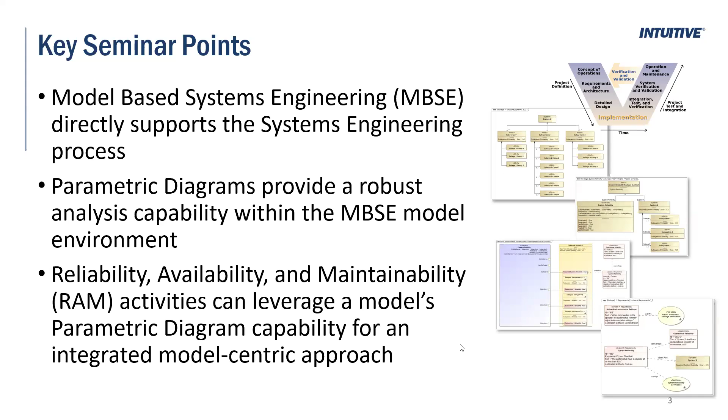So the purpose of today's presentation is to simply describe how RAM analyses can be performed within a system's MBSE environment. The topics you see here: we'll do a brief introduction to MBSE, talk about the example model and the tool that was used, the language, and various diagram types. And then we'll take kind of a methodical approach.

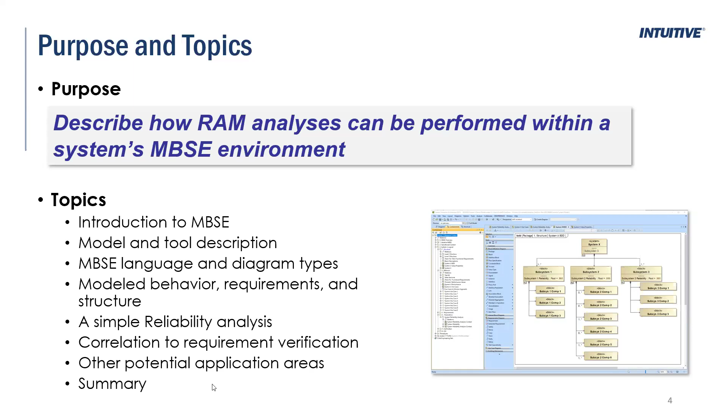Into this parametric diagram and analysis by talking about model behavior, then requirements, then structure. And then we'll get into a very simple reliability analysis using parametric diagrams. We'll correlate that to requirement verification and talk about other potential application areas. And then you get to torture me with your questions, which I hope won't be too hard.

Okay, model-based systems engineering. We get all amped up over the MB part, the model-based part, and very often we don't remember or think about the SE part, which is systems engineering. So some of you may be familiar with the systems engineering process V. There's a bazillion versions of this out there.

I picked kind of a simple one here, but it gets the point across. So before MBSE, as good systems engineers, this is what we did. This was our sort of guidance, our process. We start up here in the upper left with ConOps and operational needs, and go on down through functional analysis, then developing structure and performing the synthesis, which is allocating that required functionality to structural components, and back up the other side with putting it all together in integration, and then verification and testing.

And guess what? In an MBSE environment, we're still doing that same stuff. It's just that now we have really good state-of-the-art PC tools, MBSE tools that help us do these things and supplement them using graphical notations, languages that have syntactical and semantic meaning.

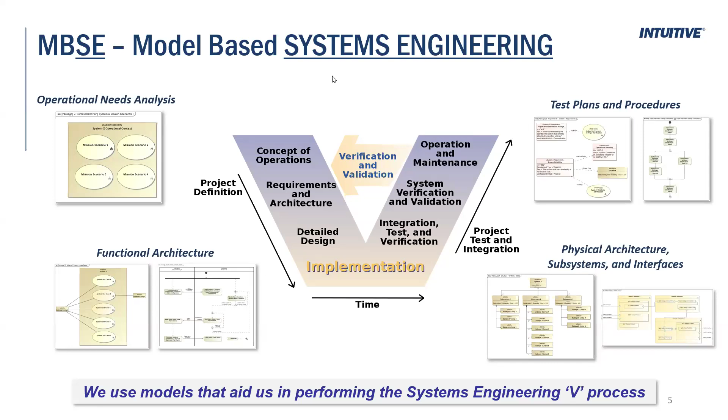So today's example model was developed using an MBSE tool, Cameo Enterprise Architecture. You may or may not have heard of it, also known as MagicDraw. And I'm also going to make use of the Cameo Simulation Toolkit. That's an additional add-in or plug-in that goes along with Cameo Enterprise Architecture.

Notation is straight SysML. You may be aware that there are various frameworks out there, UPDM, which includes DODAF, UAF, the Unified Architecture Framework. And all of those frameworks are great. I'm a believer in UAF myself, I love it. But to keep this simple and not get confused with other terminology that these frameworks bring into the picture, I wanted to stay with straight SysML.

So that's the language, SysML. It's a foundational language to all of these various other frameworks.

Our system of interest is simply System X. It is completely notional. Any resemblance to anything real is purely coincidental and maybe a figment of your imagination, because there is, it should not come close to anything that is out there. But it could be anything. Okay, it's so generic, it could be anything. And here you kind of get an idea, even a CubeSat. So keep that in mind as we go.

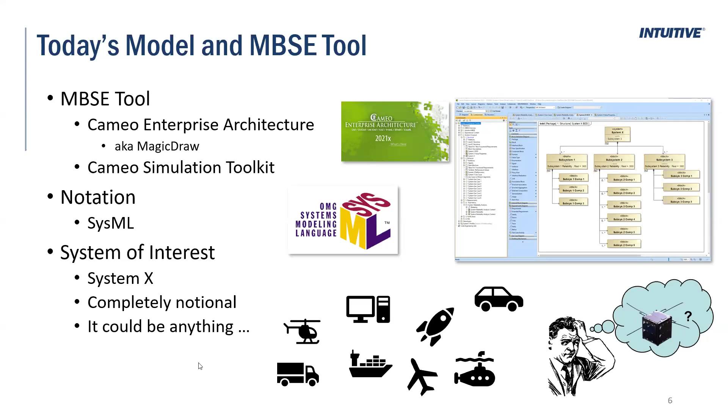Okay, the MBSE language. So we use, as I just stated, SysML, the systems modeling language. SysML gives us 3 diagram categories, 9 diagram types. We'll talk about them in a second. Very defined element types and relationships between these elements.

That's the underlying meta model, and so everything on these diagrams has semantic meaning. We're not just drawing PowerPoint shapes or lines. Everything that goes onto a diagram ends up in the meta model as an actual distinct object with attributes and relations, and that's really the backbone of the model. These element types, how they relate to one another, and how we can put them together to form diagrams that really tell the story we need to tell from a systems engineering standpoint.

Are we stuck with just what SysML gives us? No, we can customize. We can add custom stereotypes. Here's your tip for the day though: be very cautious about doing that. I've done that in the past, and I've got the scars from it. At first, it may seem like a cool thing.

If the language doesn't quite meet your need, go ahead and throw in a couple custom stereotypes or maybe a custom relationship. But here's the issue with that: the second somebody else picks up your model, they're not going to understand what you're talking about, and so that's the downside. I have found that it's so much better to try to stay within the confines of the language, customize if you absolutely have to, but I would not recommend making a habit out of it.

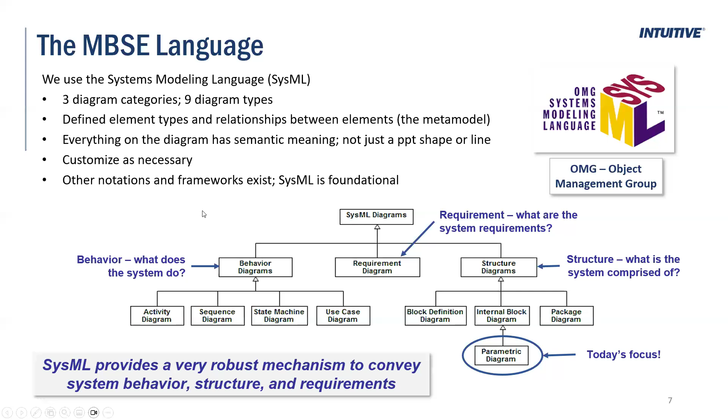I want to talk just very briefly about behavior, because what we're going to be doing is more on the requirement and structure side, but just to cover all three diagram categories, here's an example of say a set of system use cases where we define what those top level system functions are. I just call them use case A, B, C, D, and E. We show that there's a relationship to an external entity, an external actor.

And then we elaborate that with activity diagrams - think functional flow. And again, all of these element notations have a meaning. So for example, this long black bar is a fork. It means that we're doing both of these control flows in parallel, so this functionality occurs in parallel with this functionality. You see we have decision logic and loop backs and merging.

And so we can model out our required threads of behavior for our system of interest. You can see kind of the threads going on here. So that's just a very, very quick example of how we model system behavior.

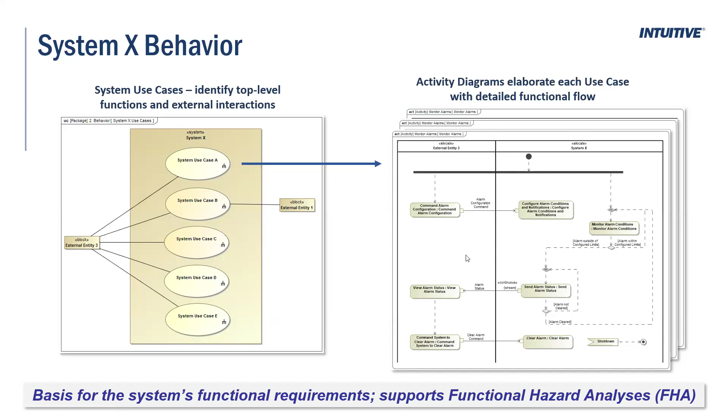So let's shift gears now and start to move towards this parametric analysis and talk about RAM type requirements in a typical system specification.

I don't know if anybody here is familiar with MIL Standard 961 or the data item description that's been around forever for a system/segment specification, 81431A. But this is the basic organization of at least the DoD system requirements specification. You get down into section 3.0, the actual requirements, and of course you've got to have your scope and applicable documents up front. But section 3 is where the requirements really begin.

So, for example, the capability requirements would be based on the behavior modeling I just talked about. But let's focus on system quality factors. That's typically, and I say typically because the first time I say that's the rule, it'll be broken and won't hold true, but typically we put reliability, availability, and maintainability requirements under system quality factors.

And that's what we've done here. We expand this package out. So in our containment tree, in our model, for what reasons unbeknownst to me, we don't call these folders, heaven forbid. We give them a special name. They're packages. So these are packages, even though they look like folders.

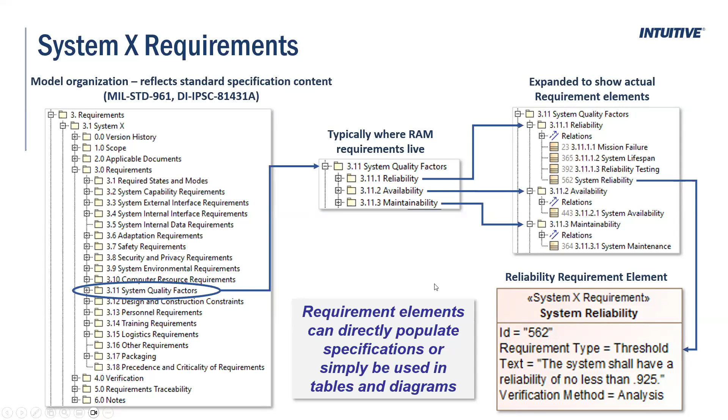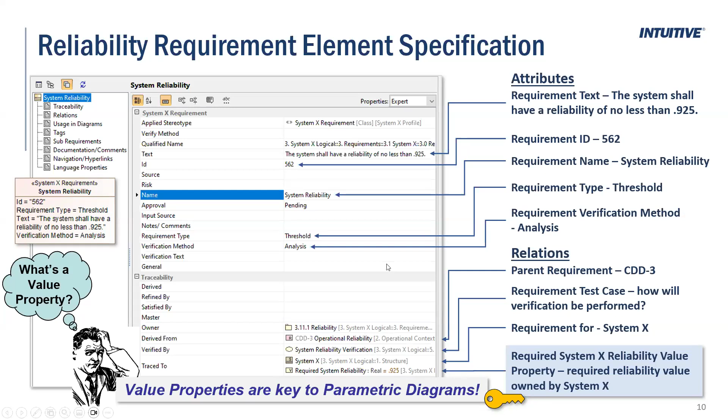Let me get down to the bottom right here, the anatomy of a value property. It's got a name. In this case, we're looking at subsystem 3's reliability, so that's the name, subsystem 3 reliability. Value properties can take on four types: real, integer, Boolean, or string. In this case, these are real values, and then the actual value itself, in this case, 0.980.

So what's going on here? Here's another block definition diagram, BDD. This time we're not doing types and subtypes, we're doing an actual directed composition. How do I know that? I know that by looking at the symbol on these arrows, this black diamond that's shaded in, and these arrowheads. This basically means that if I'm going to have a system X, I've got to have at least one or more subsystem ones, I have to have one subsystem two, and I have to have one or more subsystem threes.

Looking at it the other way, these subsystems do not exist or cannot exist outside of the context of being part of system X. So again, the symbols on each end of the line are very important.

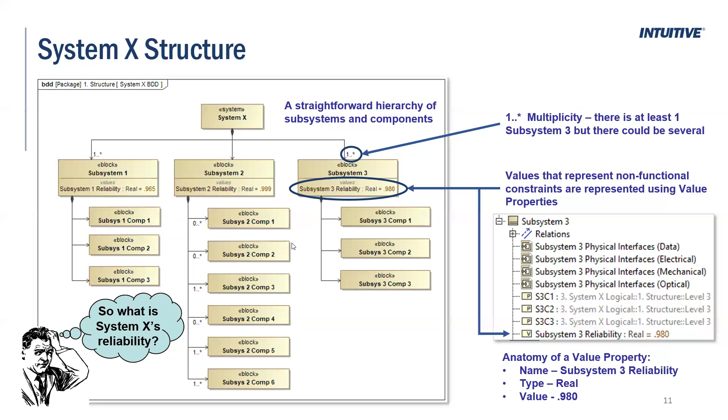But here's the key: I'm not going to go off to an Excel spreadsheet, I'm not going to pull out my stubby pencil and a sheet of paper or anything else. We're going to do this all within our MBSE environment. We've already seen how we've been modeling the structure, and we've got components here and information here. So we're going to use this as our analysis environment to do what we need to do as far as calculating these values. So there are 4 primary steps to mechanizing a parametric analysis.

The first is defining the analysis context. We've largely been doing that, looking at the model elements that are going to comprise the analysis. We've defined our equations and our parameters, and we've also identified our system of interest, subsystems, and their value properties. So we've largely done the heavy lifting on that part.

Then we need to create the actual parametric diagram. This is what actually implements the analysis. It establishes the associations between those parameters in the equations and the value properties we just looked at. And then we'll execute it using Cameo Simulation Toolkit, which is what actually executes the analysis equations and provides the results.

And then we can do a little bit of what-if analysis and scenarios. We can, right within the simulation toolkit, change some values on the fly and do a what-if to see what happens, and maybe very quickly figure out what some of our margins are. For example, if a subsystem's reliability turns out to be significantly less than what we anticipated, we could just pop that new number in and see what the result is. So it gives us a very flexible analysis environment.

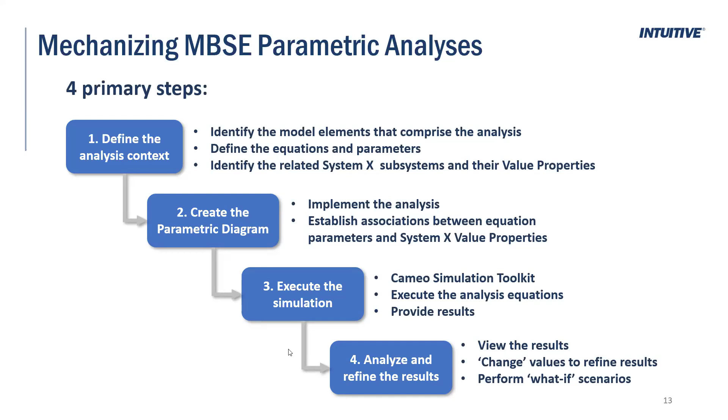Okay, so establishing the analysis context. Again, the heavy lifting's been done because we figured out the equations we want to use, and we've identified all the aspects in our model as far as the systems, subsystems, and their value properties. But we're going to go ahead and model this now. It's another block definition diagram, and by now you know how to interpret this. This is a directed composition, and so we're going to set up our system reliability analysis context.

It is going to be comprised of this constraint block, a system reliability constraint block. This is a special stereotype, a special type of element specifically for parametric diagrams. And the other part of the analysis context is our system of interest itself and those structural elements we just looked at. If you look at the contents of this constraint block, this should all start to look pretty familiar. Here's our series calculation, calculated reliability series equals, and here's our product, subsystem 1, 2, and 3. Here's the inequality we're going to check for, and then here's our parallel calculation along with its inequality.

And then further down, we do need to go ahead and identify the type of all of our parameters, and here you see they're all real. So we've done that. On the other side, this is just a simple matter of bringing in those same structural elements we had previously, and of course we're only going to the subsystem level, that's really all we care about here.

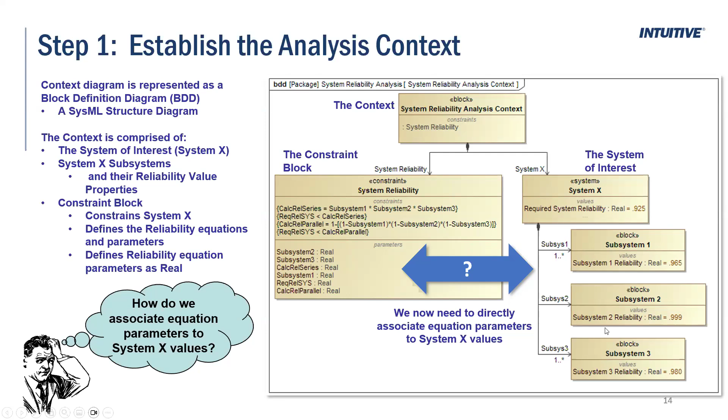So as we create the actual parametric diagram, the diagram type up here shows PAR. So now this is an actual parametric diagram. These are now named instances of the constraint block we just looked at. So this is an instance of that constraint block, and these are instances of our system of interest and its subsystems.

These are our parameters from our equations down along the right-hand side of the constraint block. You'll notice the calculated reliability parameters have no connections to anything. That's because that's what we are calculating for. I could have attached them to value properties that didn't have any value, but we'd get the same result. I just chose not to bind them to any value properties.

Again, these are our known equation parameters here, and they are going to take on the values of their associated value properties. How does it know which value property is associated with which parameter? That's from our binding. We bind equation parameters to the value properties they correlate to. So for example, subsystem 1's parameter in the equation takes on the value provided by the value property for subsystem 1. It doesn't show... well, it shows the value here, but this is the actual value property element.

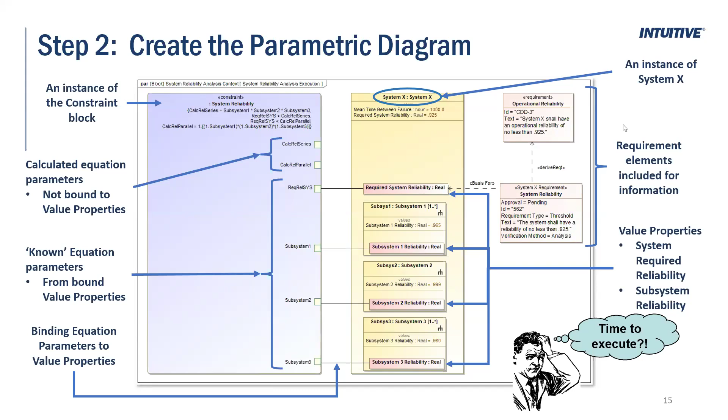Let me orient you here, starting on the left. Here's our system model, this is the containment tree, this is all that metadata I've been referring to. This is really the diagram palette, which allows you to drag certain types of elements out onto the diagram. Here's the parametric diagram that we just looked at right here.

I'm going to hit the run simulation button up here, and that's going to invoke the Cameo simulation toolkit. What pops up here at the bottom are the various execution panels. The first is simply the control simulation start and stop type buttons. The second is the console, which provides the status. If I had done something wonky up here, misconnected something, or did something that would not allow the simulation to run, I would get a simulation fail down here, and then I'd have to go figure out what I did wrong. Again, this provides the status.

And then probably the most important panel for what we're doing is the variables panel. This is where we see all of the values, known and calculated, for all of these various variables. We're going to get into detail on this variable panel here in a moment.

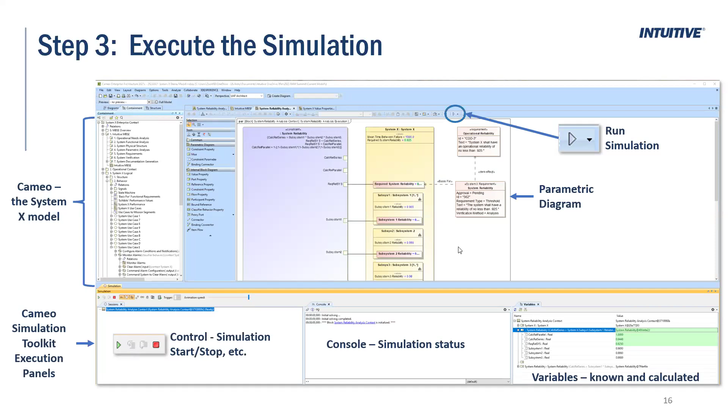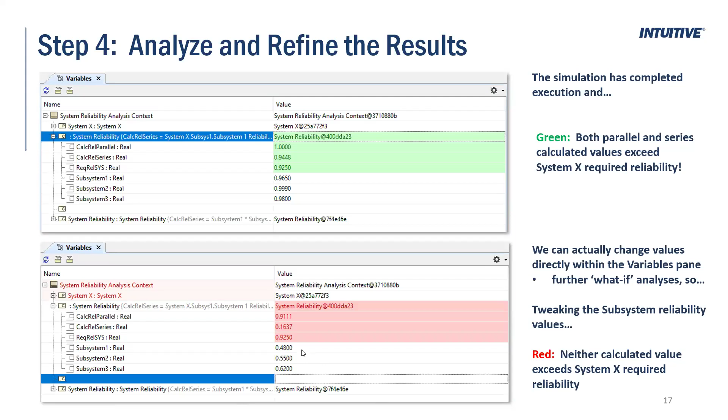I would be, let me start this way. I've not used it. I've not done it. Okay, but I know it exists. I hear tell of it. And I would be remiss if I did not talk about, or at least let you know, that there's an external evaluator capability. Well, what does that mean?

Well, so we've been doing simple math functions. So the capability, at least within this tool, is fairly robust. And so we can do a lot of different types of mathematical equations. And I think there's even a Monte Carlo capability built in. But you may have a much more custom or intense analysis that you need to perform that the out-of-the-box, or built-in math functions, just aren't going to cut it for you.

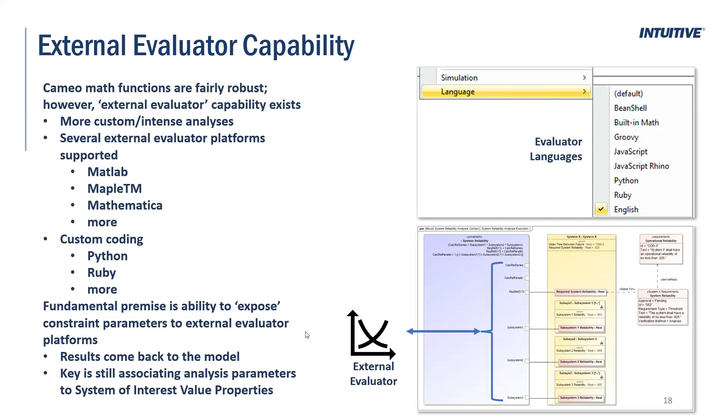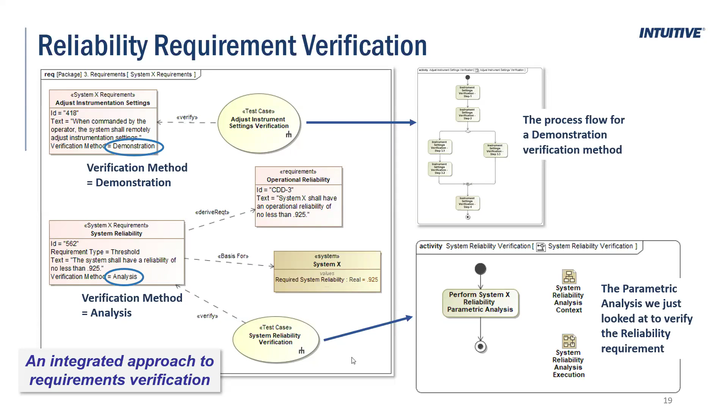Other potential applications, this is just one very simple example. What about other RAM calculations, availability, mean time between failure? What about other physical aspects of your system? If we're in an aircraft domain, weight roll up is incredibly important. Center of gravity. What about risk calculations? Likelihood times consequence, right? We've all seen that. So here's the message: anything that can be represented as a value that is owned by the system or one of its components can be used in a parametric diagram analysis. So really, the sky's the limit.

This was just one example focusing on the domain of RAM and reliability, but you could literally apply this to so many things. The whole area of parametric diagrams and parametric analysis is right there, available to anybody doing an MBSE project, any MBSE practitioner. I think the challenge is getting out of our paradigms that say, 'Oh, I got to do a calculation, let me whip out my Excel spreadsheet, or let me go straight to MathCAD or something like that.' And we fail to realize, or maybe we don't immediately see, that we could do this all within an integrated fashion, as I've shown you, tied to our system structure, even to behavior.

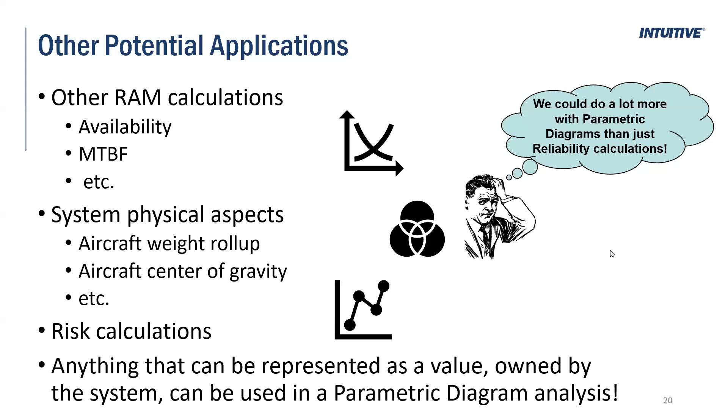So I will get off my soapbox, and that's it. If anybody has any easy questions, I would be happy to answer them or attempt to answer them, and I hope you found this beneficial and worthwhile.

Thank you. Thank you very much, Keith.

That was exceptional. I've done a bit of reliability modeling and some of our other SysML models, but it was really nicely laid out here in the process for making it come to fruition and make it executable. That was really nice. I've got a couple questions, but I'd like to open the floor for the students, if anyone's got anything. I know hands weren't raised early on, so people weren't exactly familiar with reliability, so if you had any follow-up questions to increase your awareness or anything at all.

I'll start while the students brainstorm. So would it—the first step in your process when you're making your use cases, when you're doing the functional decomposition, you started with system reliability, and then later you talked about mean time between failures and other types of quantifiable measures of RAM. Are you thinking about functional or performance reliability when you're defining the use cases? I mean, how early in the process are you thinking about reliability? Because I do hear some people who work in the business say that they lament that reliability is only considered as an afterthought.